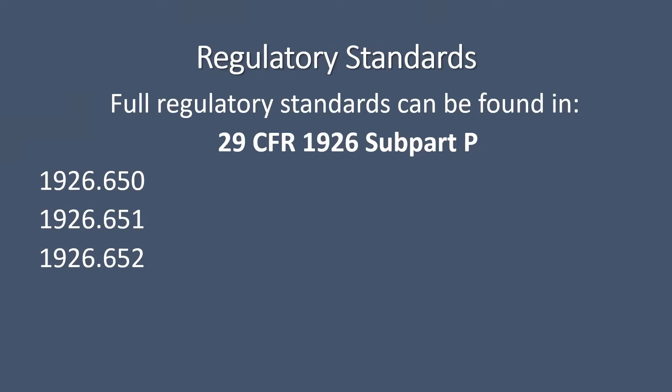All trenches are excavations, but not all excavations are trenches. An excavation is any man-made cut, cavity, trench, or depression in an earth surface formed by earth removal. A trench or trench excavation means a narrow excavation in relation to its length made below the surface of the ground. Generally, the depth is greater than the width, but the width of a trench, when measured at the bottom, is no greater than 15 feet.

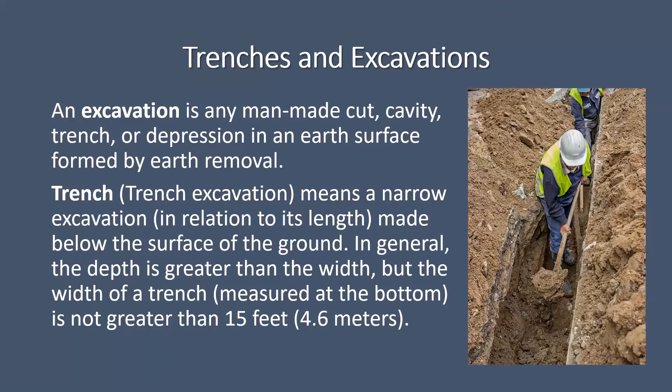With all excavations comes the requirement to have a competent person. Any excavation, regardless of depth, is required to have a competent person complete a daily or pre-entrance inspection of the excavation, adjacent areas of the excavation, and any protective systems that may be in place. The competent person will complete a manual soil analysis and a visual inspection of the excavation and the environment that surrounds the excavation. The competent person will determine if there is potential for a collapse.

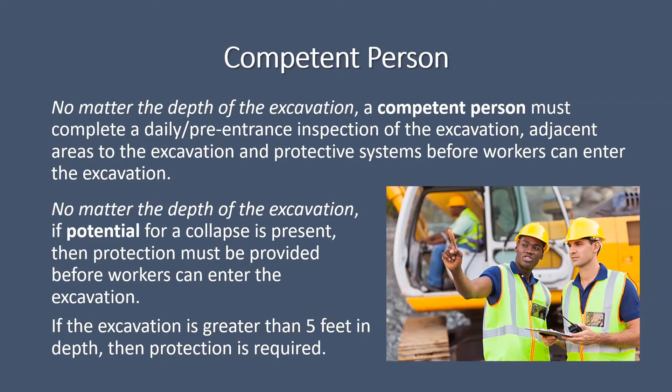If there is a potential for a cave-in, then protection must be provided or installed before workers can enter the excavation. If an excavation is greater than 5 feet in depth, then a protective system is required. We will discuss those later. It is important not only for the competent person to know what to look for as far as potential for a collapse, but it's also important for the workers to know as well.

When determining potential for a collapse, soil composition plays a crucial factor. The weaker the soil, the greater the potential for a collapse. Weather conditions are also a contributing factor for a collapse. If the weather has been hot and dry, the soil is impacted. This could weaken the stability of the soil. The same goes if there's been a lot of rain. This could cause runoff and erosion on an excavation, increasing the potential for a collapse.

The environment that surrounds an excavation can contribute to a collapse as well, such as working near roadways or heavy equipment working around an excavation. Vibrations that come from vehicular traffic can cause a collapse, as well as other heavy operations that may occur near an excavation, like pile driving. When sloping excavations, soil classification needs to be conducted. Different types of soil require different types of sloping configurations. For example, type B soil can be benched, while type C cannot.

When looking for potential for a collapse, a visual inspection is required. Visual inspections include looking for fissuring or cracking in the walls of an excavation. Fissures and cracks can identify weak areas in the soil, areas that would be more likely to cave in. When looking at the walls of an excavation near a roadway or building foundation, you want to look for undermining. Undermining is when excavation walls have been dug under existing concrete, asphalt, or other structures that could collapse.

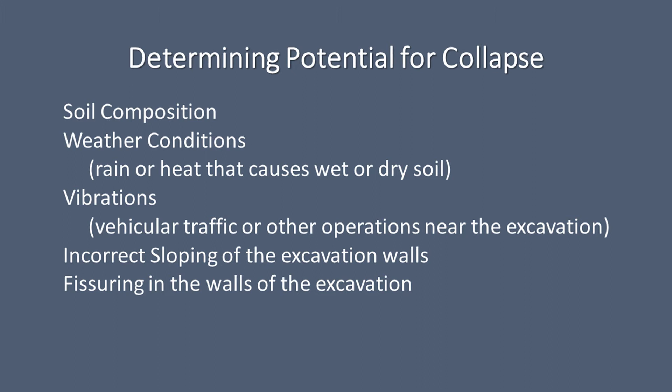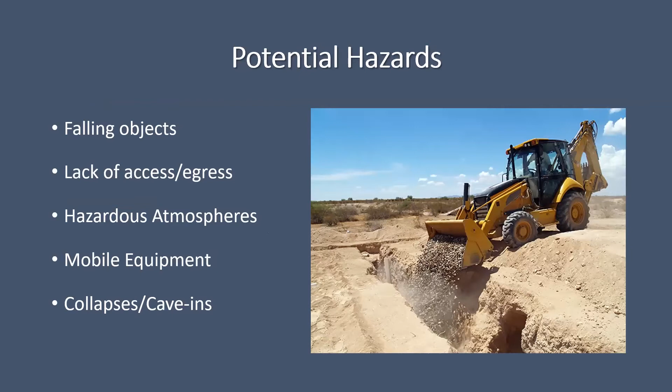There are many potential hazards associated with excavations: falling objects, lack of access and egress, hazardous atmospheres, mobile equipment, and one of the more severe hazards, collapses or cave-ins.

When workers are in an excavation, they are working below ground, which means that they are more prone to objects falling from overhead. Falling objects could be anything from soil and rock to materials, tools, and even equipment. Adequate protection is required to be provided to protect employees from loose rock or soil that could fall or roll from an excavation face. Workers are also required to be protected from excavated or other materials or equipment that could pose a hazard by falling or rolling into excavations.

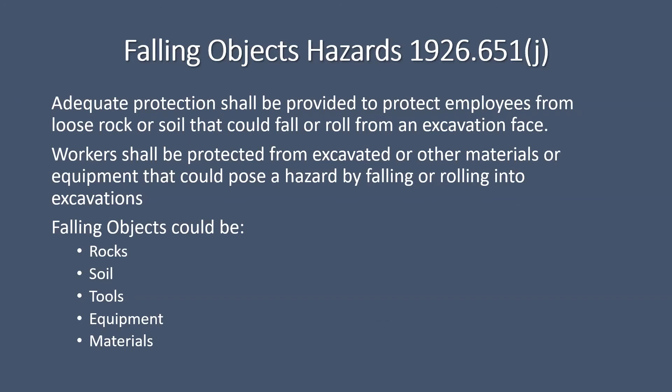Another hazard associated with excavations is a lack of access and egress. Means of access or egress means a way in and out for workers. If an excavation is greater than 4 feet in depth, then a means of egress is required. This can be a job-made ladder, an extension ladder, stairways, or structural ramps, or even sloping the excavation at a 34-degree angle or less, so that workers can simply walk out of the excavation. If structural ramps are used, then they must be designed by a competent person. Means of egress cannot require workers to travel more than 25 feet laterally.

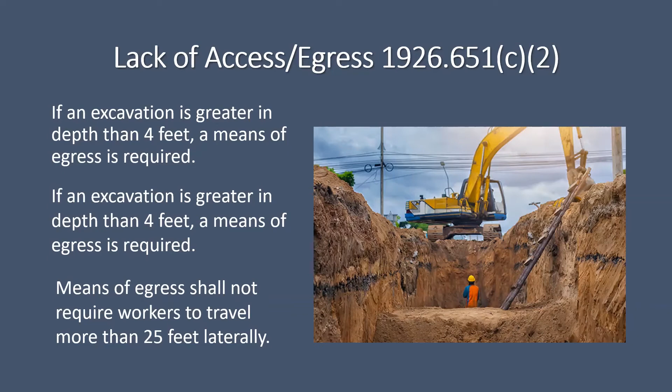If an excavation is greater than 4 feet in depth and there is potential for oxygen deficiencies or hazardous atmospheres, the excavation shall be tested before workers enter. If an atmosphere contains less than 19.5% of oxygen, then adequate precautions shall be taken to prevent workers from being exposed.

If the atmosphere in an excavation contains a concentration of flammable gas, then adequate precautions shall be taken to prevent workers from being exposed. In the event that an excavation requires atmospheric protection, then the atmosphere will need to be tested to ensure that the control measures are maintaining a safe atmosphere. Though there are different situations that can produce a hazardous atmosphere, they are most common in areas where hazardous substances are stored nearby or in excavations that are in or around landfill areas.

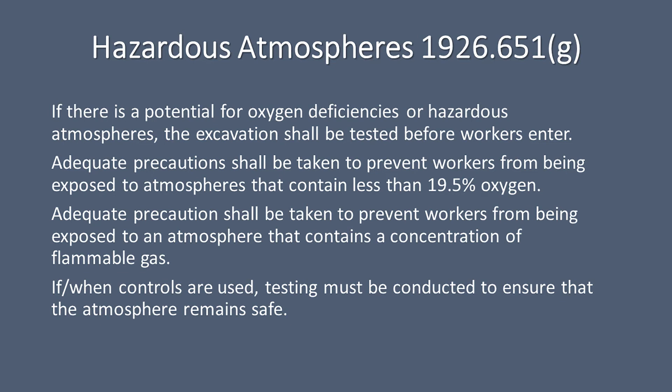When an excavation is located near a roadway and workers are exposed to vehicular traffic, the workers must wear suitable garments. These garments should be made of reflectorized, high-visibility material. If mobile equipment is being operated along the sides of an excavation or is required to approach the edge of an excavation and the operator does not have a clear and direct view of the excavation, then a warning system should be put into place. A warning system can be flagging, a fence, a curb, or any other means that alerts the operator of the equipment that they are nearing the edge of the excavation.

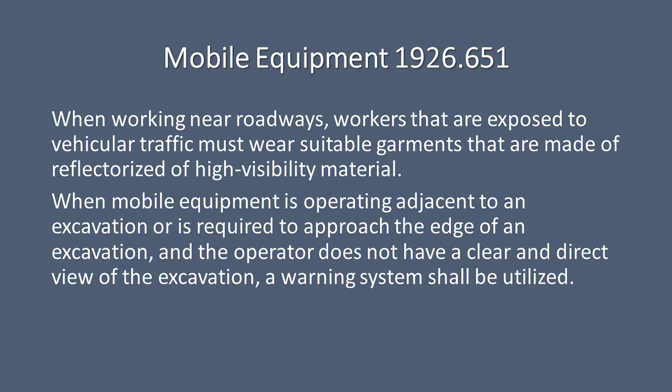We talked earlier about potential situations for a collapse. The outcomes of a collapse can be detrimental, not only to the production of work, but also to the workers themselves. If a worker is caught in an excavation collapse, they can be victim to a variety of fatal health effects, such as blood clots, pulmonary embolisms, lacerations, abrasions, amputations, and suffocation.

Workers are required to be protected from cave-ins except when the excavation is made entirely of stable rock, or when the excavation is less than 5 feet in depth and the competent person inspects the excavation and determines that there is no potential for a cave-in. Here is an example of how the competent person would determine if there is potential for a cave-in and if a protective system is required.

A trench is 4 feet wide, 4.5 feet deep. During the competent person's visual inspection, he notices that there is some fissuring or cracking throughout the trench walls. Though the trench is less than the 5-foot minimum height to be required to have a protective system, during the visual inspection, the competent person determined that there is potential for a cave-in, given the cracking in the trench's walls. The competent person would then evaluate the situation to determine what form of protective system would be best suited for the trench.

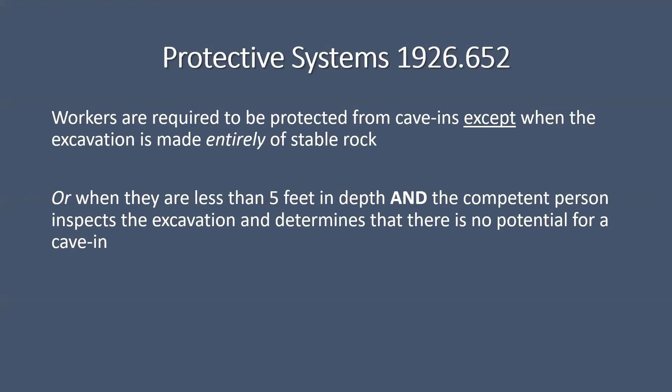Given that the trench is 4 feet wide and other contributing factors, a trench box would be the best suited form of protection. There are different types of protective systems, such as sloping or benching, shielding, and shoring. Sloping and benching diagrams are located in Appendices B of Subpart P. The most common type of shielding is a trench box. These can be stacked if they're designed to do so.

When using a trench box in all 3 types of soil, the top of the trench box cannot be less than 18 inches above the top of the vertical side, which means that the trench box cannot be below or level with the top of the excavation's wall. It has to be at least 18 inches above the top of the wall of the excavation.

Shoring can also be used as a form of a protective system. This can be timber or hydraulic shoring. If a manufactured type of protection, like a trench box or hydraulic shoring, is being used, then the protection must be used in accordance with the manufacturer's requirements. There are appendices in Subpart P that are specific to each type of protective system, how to select and use a protective system. The appendices for trenching and excavations are mandatory.

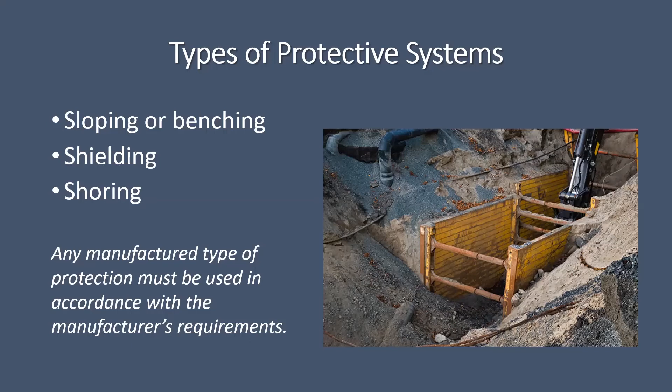In 2018, the Federal Occupational Safety and Health Administration issued a national emphasis program on trenches and excavations. Given the high fatality and serious injury rates related to trenches and excavations, the National Emphasis Program increased an enforcement presence on trenches and excavations by consultants and compliance officers.

The details for compliance, safety, and health officers under the National Emphasis Program include initiating inspections under the National Emphasis Program when they observe an active trench or excavation that's deep enough to present a hazard, regardless of whether or not a violation is readily observed. The observations that the compliance officer makes can occur during the course of their normal workday travel or while they are engaged in programmed or unprogrammed inspections.

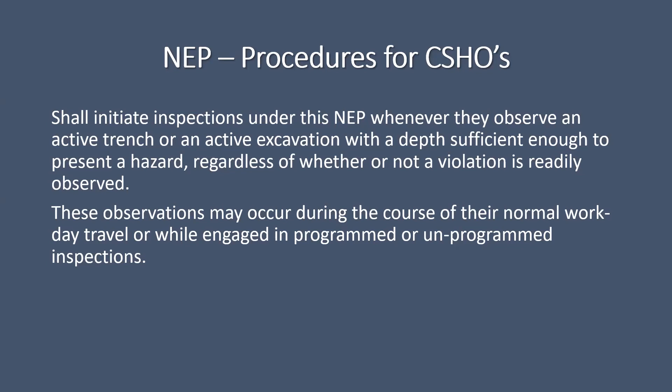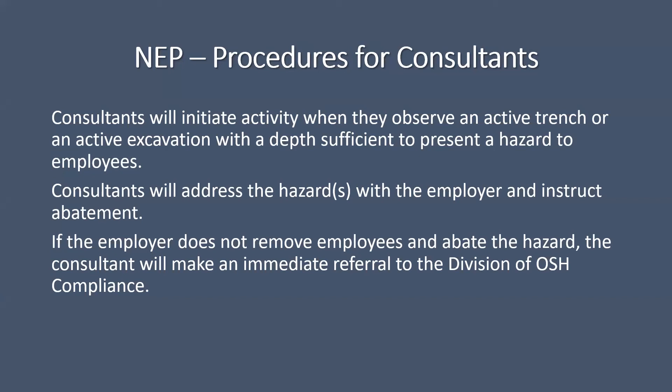The details for safety and health consultants under the National Emphasis Program include consultants initiating activity when they observe an active trench or an active excavation with a depth sufficient to present a hazard to workers. Consultants will address the hazards with the employer and instruct actions for abatement. If the employer does not remove the workers and abate the hazard, then the consultant will make an immediate referral to the Division of Occupational Safety and Health Compliance.

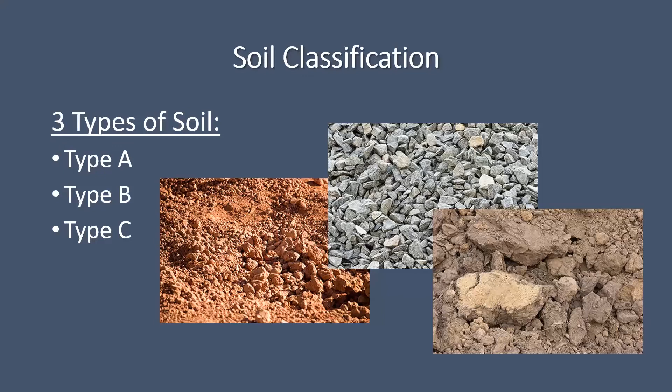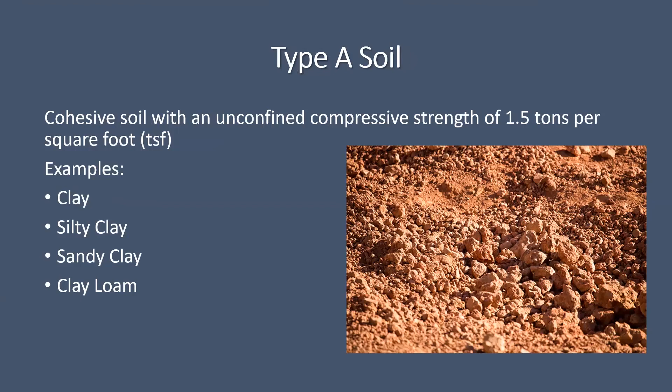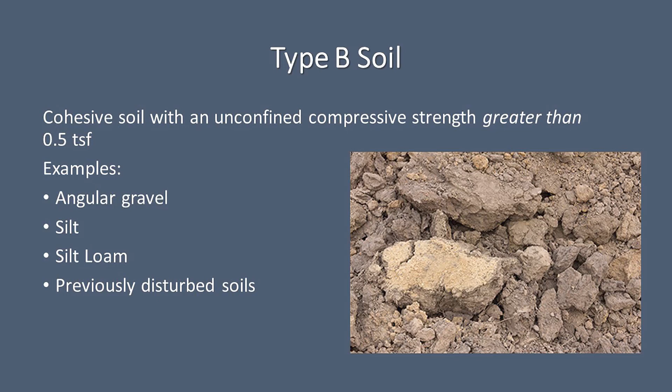When classifying soil in an excavation, there are three types of soil: Type A, Type B, and Type C. Type A is cohesive soil with an unconfined compressive strength of 1.5 tons per square foot. Some examples of Type A soil include clay, silty clay, sandy clay, and clay loam. Type B soil is cohesive with an unconfined compressive strength that is greater than 0.5 tons per square foot. This includes granular cohesionless soils such as angular gravel, silt, and silt loam. This also includes previously disturbed soils that were not previously classified as Type C.

Type C soil is considered to be the weakest out of all the three types of soil. It is cohesive soil with an unconfined compressive strength of 0.5 tons per square foot or less. Type C soils are granular soils that include gravel, sand, loamy sand, and submerged soil. Type C soils are submerged and unstable and can be material that is sloped and layered in systems.

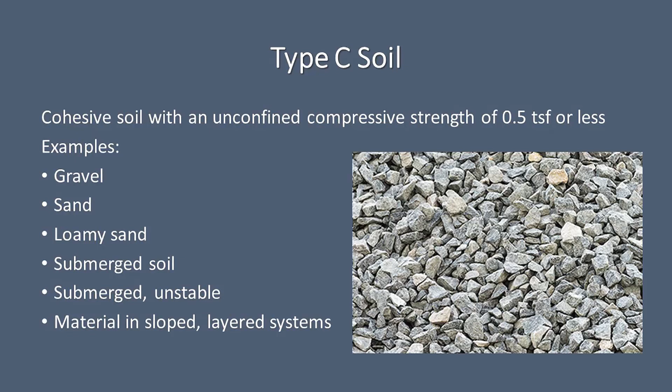Emergency rescue equipment such as breathing apparatus, a safety harness and line, or a basket stretcher shall be readily available where hazardous atmospheric conditions exist or may be reasonably expected to develop during work in an excavation. Employees entering bell-bottom pier holes or other similar deep and confined footing excavations shall wear a harness with a lifeline securely attached to it. The lifeline shall be separate from any line used to handle materials and shall be individually attended at all times while the employee wearing the lifeline is in the excavation.